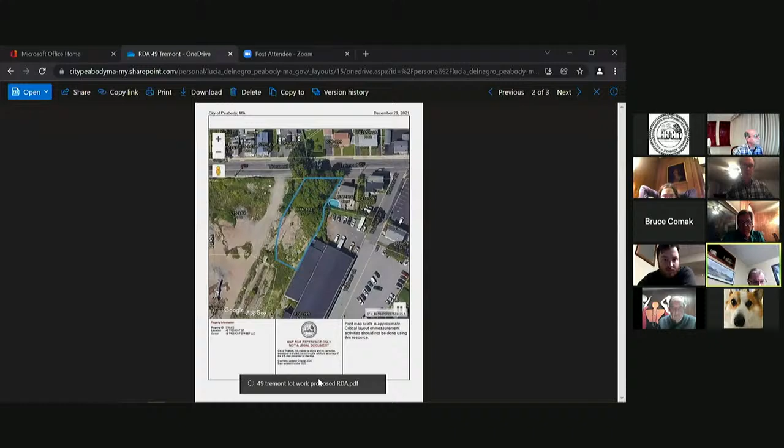I think there were two sheets from the plan that were filed, one that showed quite clearly the lot divisions and landscaping, and the second was grading, utilities, et cetera. And yes, that is the lot that Lucia has provided. That is the lot, and there is no building on it.

Since that aerial photo was taken, the grading to the west has all been completed, and there is a building currently being completed on the rear lot, to the lower right. That third building shown on the plan, so there are 3 buildings.

You want to build the one from lot 2A. You're saying the building on the lower right is under construction now? Well, now I've lost that. The building at the rear,

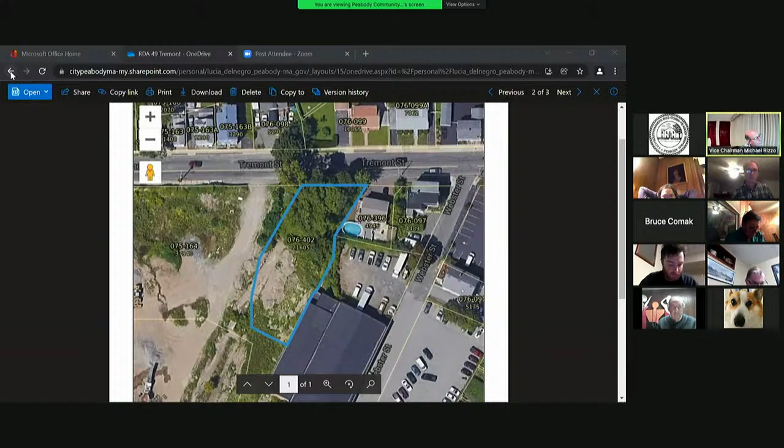14,730 square feet, yes, that's actually up. That building is up and receiving inspections as we speak.

I see, and the other one, the one closest to the street, has never been begun, and I believe that Ahmad, if he follows through with this project, that proposed 2-story building may have to have its own filing. He bought that lot over 2 years ago and has never begun construction.

And the proposed building, 14,730 square feet, which sits on lot 3A, that is built.

Through the chair. Go ahead. What is the scope of work for this RDA?

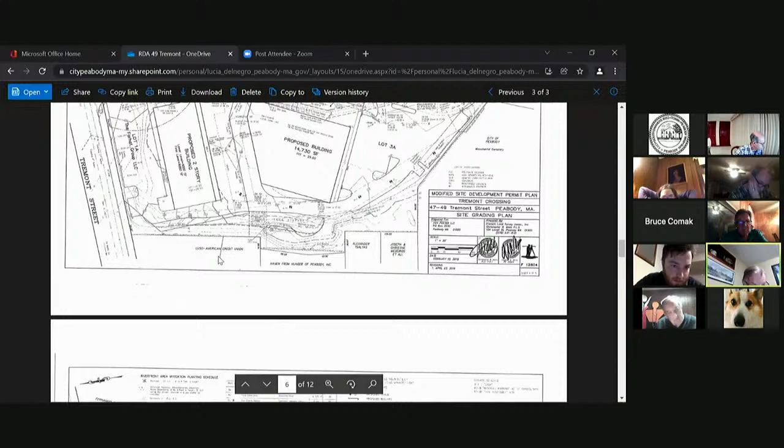The scope of work contemplated for this would be the actual construction of the building and the installation of the plants required. Do you see the area in front of the 2,200 square foot building? There's an area, yes, I think Lucia is pointing to it now, those plantings that are up.

Adjacent to Fernando Cunha and adjacent to the open portion of the stream, those plantings must be completed. There are plantings there today, some of which were never disrupted and never removed, but it requires a planting scheme. There's a site planting schedule that had been previously approved, and that would be the planting configuration that would take place.

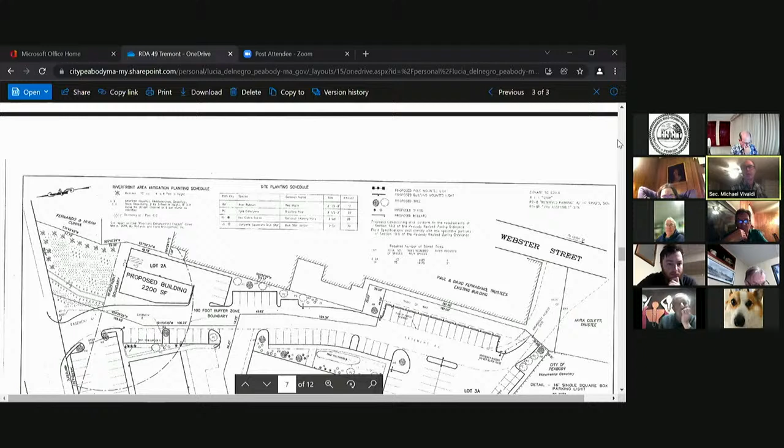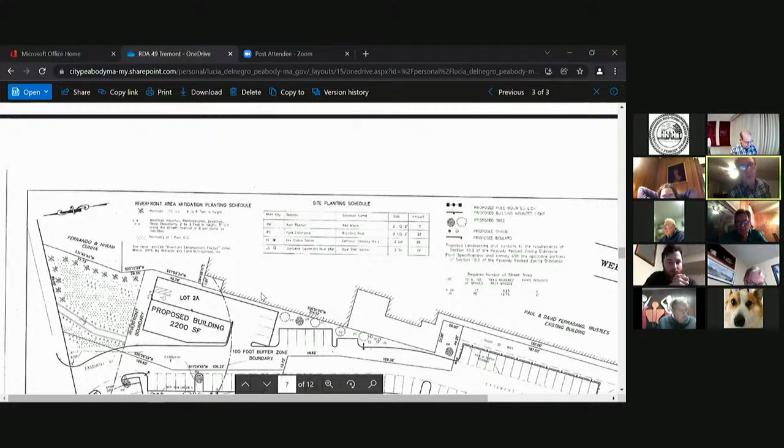If I may, I'd like to ask a question. Go ahead, Mike. If an NOI was originally submitted for this application, the original construction process years ago, and now the applicant would like to submit an RDA, I didn't follow the reasoning for this change of applications, if the work is the same or not. It was kind of confusing, I'm sorry to say.

Oh, it is confusing, and not working with it daily, it was a little bit confusing. So why does the applicant feel that an RDA is sufficient at this time?

My sense was, when we were given notice, we were in the site plan review process. Nothing had changed with respect to the physical aspects of the plan, the grading, utilities, et cetera, were all intended to be the same. When we were provided with notice, very accurately, that our order had expired, I thought it was more expedient and cost effective, since we were building everything just as originally approved without change, including the odd shape of that 2,200 square foot building.

We were still intending to build it in that fashion and are intending to do so today. My feeling was that it would be more direct and faster to ask for an RDA based on building in accordance with the expired order.

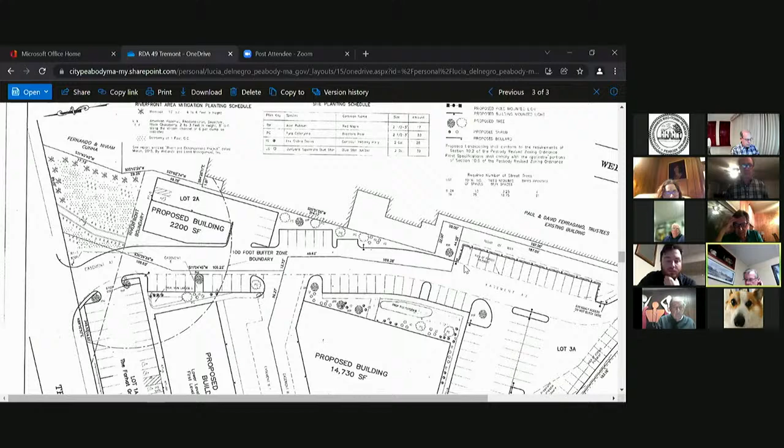Stormwater management had been scrutinized, and we changed, upgraded, and upsized the stormwater management system during the process until we were finally approved by the Public Services Department, and we have installed downspouts at their direction.

We've provided some, there's a small retaining wall, which is really on the property line between ourselves and Paul Ferragamo's building, which has been in existence for 100 years. We've got a retaining wall there that was approved by Public Services, which will prevent overflow to his property.

Is that on this? Is that on these plans, that wall and stuff? Yep, because all the work having been undertaken has all been undertaken with those approved plans. And that's the set of plans that is referenced in the order of conditions. And I provided 2 sheets from that plan.

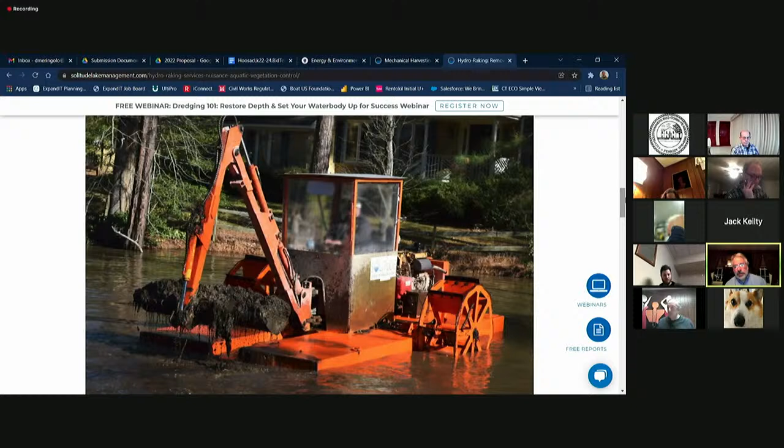This is not considered dredging. It does not remove any material that has been consolidated into a mucky material. The York rake—I'll see if I can find a different picture.

You can see right here, this is a York rake, so it's not a bucket. It will only collect material that has some structure to it—not a fine grain muck material, only something that has root systems or still has some structure to the plant.

Basically the machine goes into the work area, removes the vegetation, brings it over to shore, and drops it off. Either that, or we have a floating pontoon barge or even a mechanical harvester used as a transport barge. The hydro rake will sometimes load that machine or barge and then move it over to shore, so it doesn't have to go back and forth to shore each time.

But it's a very effective way of removing that built up organic material and helping to restore some water depth, removing all of that material that otherwise would be slowly decomposing and creating an oxygen demand.

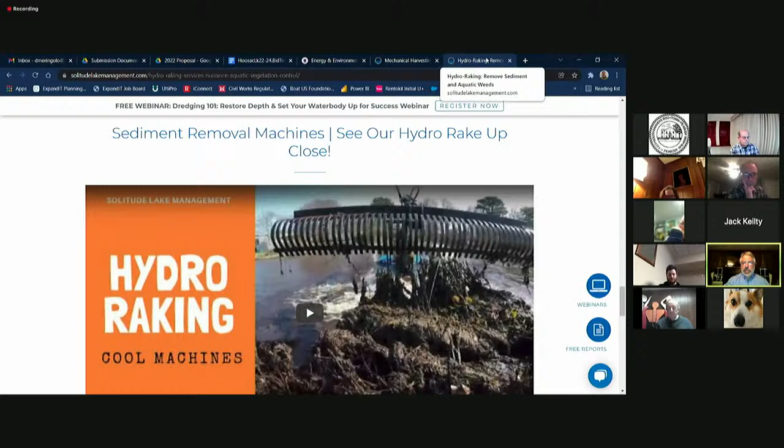For the hydro raking versus the harvesting—hydro raking is more likely to be used on the recreational water bodies. Harvesting could be used to remove plants in the drinking water reservoirs, where herbicides are not allowed, or most herbicides are not allowed.

Harvesting could be used in those water bodies to remove submersed plants that typically aren't the best thing to remove with the hydro rake. They have less biomass, are more dainty I guess is the right word, and don't have a really significant root system. The harvesting can be used to remove those plants.

It's definitely a very good alternative to using herbicides for the drinking water reservoirs. And as I mentioned, the mechanical harvesters are sometimes used as a transport barge, so they're not actually doing the cutting themselves, but they have storage on the back of the machine. As you can see in this picture, the hydro rake can load up the back of that machine like a barge, and that can be used to transport material back and forth to the shoreline.

Right now, there is work being planned for Elginwood and Mill Ponds, but this NOI is very generic in nature for all water bodies. So as stated in the NOI, as work develops and gets planned for any of these individual water bodies, we would prepare and submit a more detailed work plan.

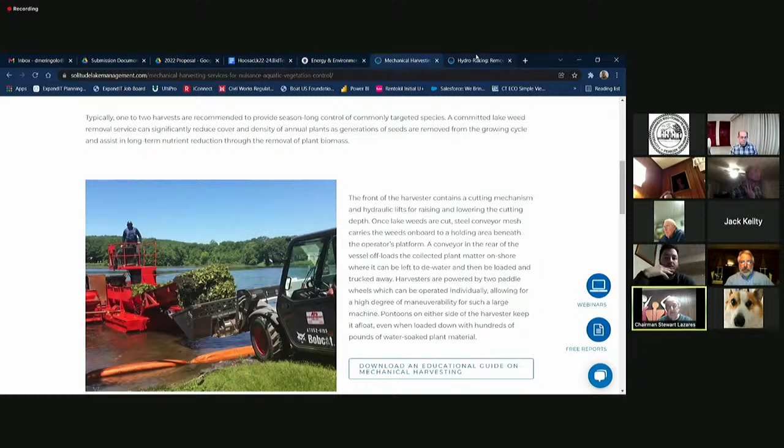Anybody else? No, I'm good. The NOI has already been signed by the mayor, so I believe we do have a file number - I checked earlier. Okay, still sharing my screen I guess - you can see it right here. There's a file number and there didn't appear to be any comments.

I don't recall ever actually getting the file number letter from the DEP, but I did search again right before the meeting, saw the file number, didn't see any technical comments.

So just going on Stewart's statements a few minutes ago, is the goal to achieve and clean all the ponds mentioned in this NOI, or to do half or a quarter for 2022? Well, in 2022 and 2023, we'll be lucky to get one pond a year. However, does it take that long to do one pond? No, it costs that much money.

It's all about the cost, yeah. So the way we're paying for this is we're applying for funds from the Community Preservation Commission to help us defray the cost - it's under restoration of open space. So, again, you'll have an opportunity... it's affordable, but we wouldn't want to do it all at once anyway. That would be an extreme cost.

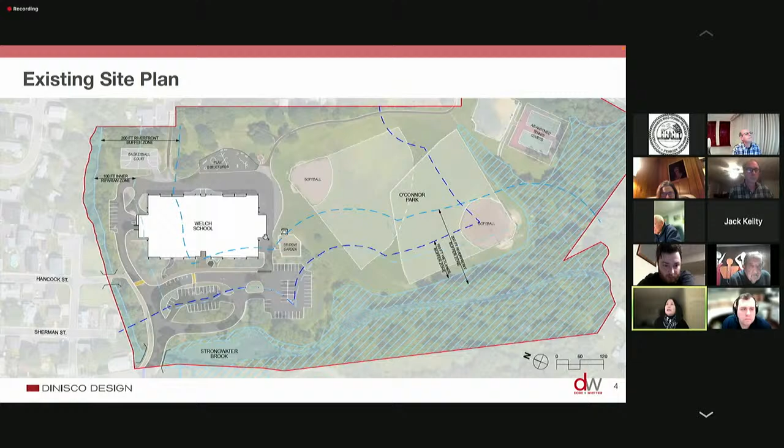The project site, as you may all be familiar, is about a 19.6 acre site. It's bordered on the north and the west by Strongwater Brook and by O'Connor Park to the south, and a residential neighborhood on the east. So while the site is fairly large, our limit of work really is limited to the area around the building. You can see here, the dashed line defines about a 4.27 acre parcel of work.

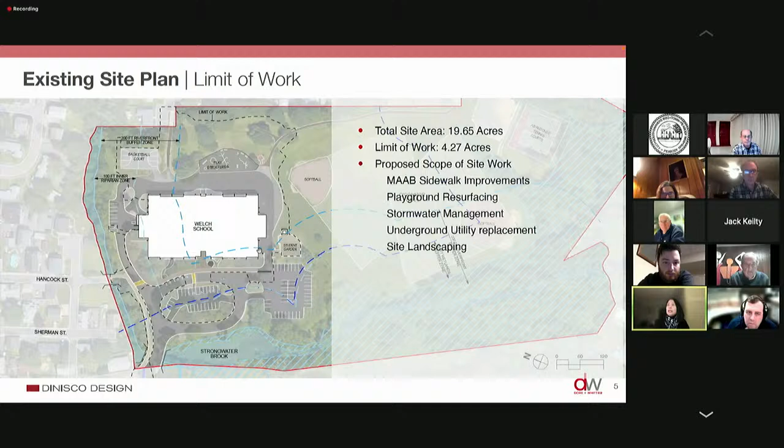So as I mentioned before, these are the proposed site improvements. We will be doing work on sidewalks to provide an accessible path from the surrounding neighborhoods. That will include curb cuts and some curbing work. We will be relocating accessible parking spaces into this existing parking area, creating a table so that there's an accessible path from this parking to the building.

The existing playground will be repaved. The area where the play structures are will also have new finish and a new rubber surface. The basketball court, which is where the CM is planning on staging and locating their trailers, will also be repaved at the end of the project.

So in this little area in orange is a 425 square foot building addition. There will be limited utility work, so some of the site work will involve doing a little bit of trenching and backfill. We are adding a sprinkler system in the building, so we are tagging on to the existing water service and creating a fire service that will go directly into the building. We have a little bit of duct bank work for communications, and that is pretty much it for utilities.

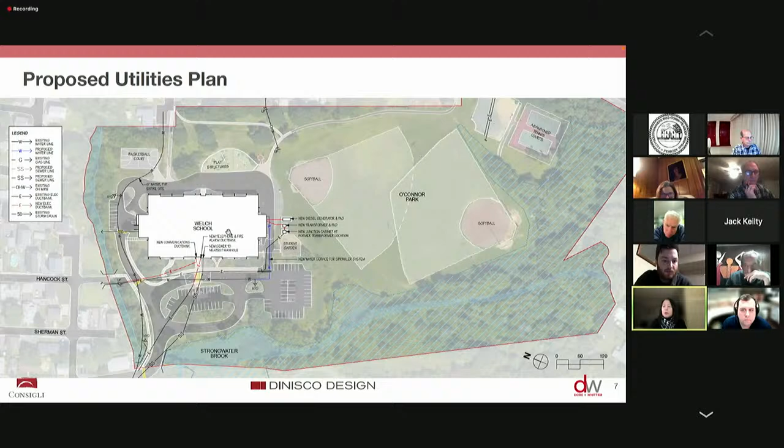There is going to be a fair amount of stormwater work that Kevin will be talking about. So with this work, we will also have a little bit of planting. The site has a good number of mature trees, and those will be protected during construction. You can see that these little dashed lines around these trees are where those existing trees are. We will be planting a couple of red maples on the backside where the improvements are being made to the playground. And then there will be a few shrubby areas here, which will include deciduous, evergreen shrubs, as well as grasses and perennials.

Kevin? Once again, my name is Kevin Riopel. I'm with DGT Associates, the project civil engineer. I'm going to talk briefly about the wetland resource areas, stormwater management, and how we're complying with the DEP regulations and the city's regulations. So just briefly, the existing wetlands on the site were delineated by Fred King in our office back in September and October of 2020.

The resource areas on the site are within the watershed of Strongwater Brook, which is a perennial stream and is classified as a river under the Massachusetts Wetlands Protection Act, as well as the Peabody regulations. The river flows westerly through the site, along the western side of the site in about a northwesterly direction. It flows underneath Swampscott Ave in 3 very large culverts, and then flows northeasterly along the northerly property boundary. Bordering vegetated wetlands were also found to exist along most of the westerly portion of the stream throughout the site. Next slide, please.

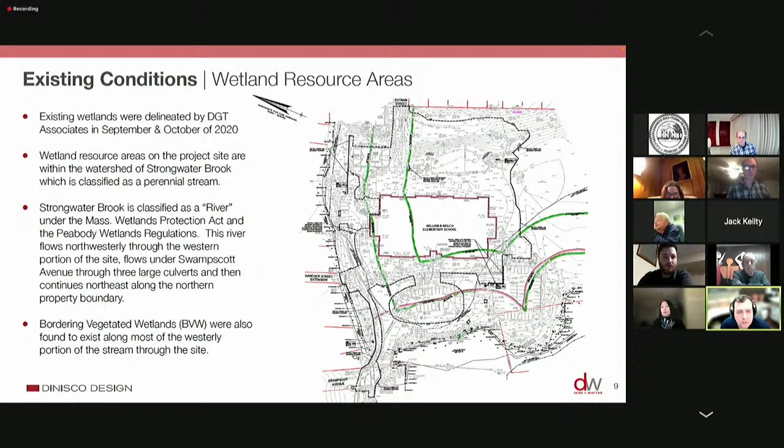So, work within the jurisdictional areas. As Vivian mentioned, we are proposing total alterations for the project of 4.27 acres of the total site acreage of 19.65. So relatively small in comparison to the entire site.

We are proposing about 0.36 acres of work within the buffer zone, and we are proposing 2.18 acres of work within the riverfront area. There is a total of 7.64 acres of riverfront on the site. All of the proposed work is within previously disturbed and altered areas. There are no alterations proposed to any of the existing natural areas on the site.

Prior to the start of any work, we are proposing to install all of our perimeter erosion control barriers, which will be maintained throughout the construction process. I did speak with Lucia earlier today, and we are going to be adding some additional erosion control barriers.

These are going to be installed to protect the westerly wetlands, mainly in the area of that parking lot where we're going to be doing handicap parking improvements. There's a little bit of repaving going on in there, very minor grading work in that area, so we are going to add some additional erosion control barriers on the plans there. Next slide, please.

Without getting too deep into it, I'm not going to bore everybody tonight with my several hundred-page stormwater report, but I'd just like to hit some highlights for everybody.

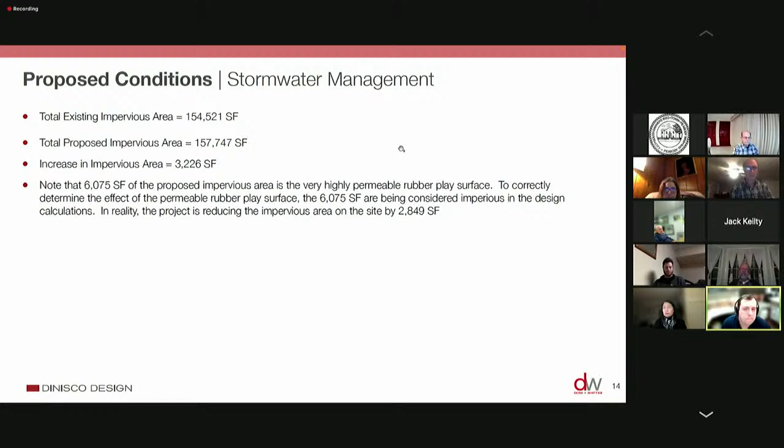So what does it all mean? After our stormwater analysis, we're looking at no increase in the peak rates of runoff for any of the storm events—the 1, 2, 10, 25, and 100-year design storm events—to any of the design points, either areas of the wetlands or other analysis points. The same can be said for the volume of runoff; we're not providing any increase to any of the design or analysis points.

We are providing the recharge to meet the DEP stormwater regulations. Both the Recharger number 1 and the rubber play surface are considered LID stormwater techniques, and we're actually reducing the amount of paved surfaces in the riverfront area by just over 1,100 square feet. I do have complete documentation showing how we maintain compliance with all 10 standards in our stormwater report, including hydrologic analysis and stormwater operation and maintenance plans. If anybody has questions at the end of the presentation, I'd be more than willing to get into as much detail as you'd like.

So with that, I'd like to hand it back to Vivian.

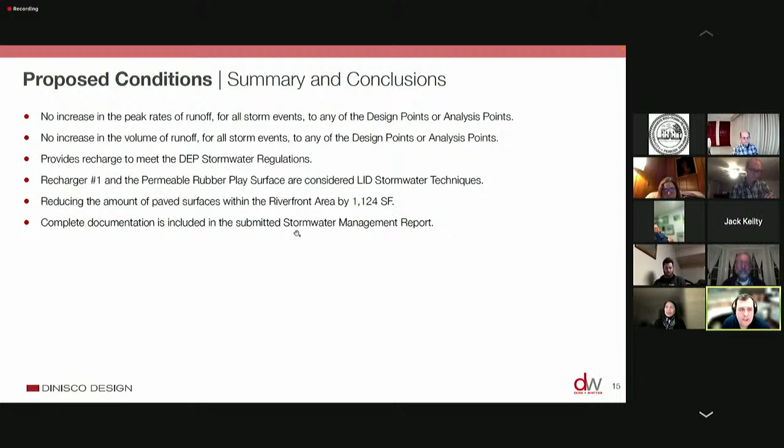Thanks, Kevin. So we just have a few photos to share to give you a little bit of context, and most of you may be familiar with the school. The site, in terms of pavement, is not in great shape, so where we can, we are repaving. However, the budget for this project is fairly limited, so we are trying to get as much bang for the buck as possible.

Here's the front entrance, and this is the existing crosswalk. We are going to be building the addition right in front of this existing entrance to bring the admin area out, so there is more of a presence once you enter and approach the building. That provides a great deal more security than they currently have.

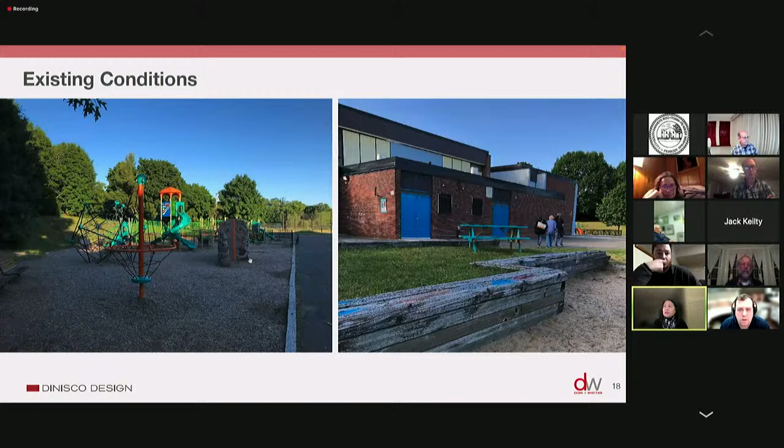As you scoot around the building, this is the loading dock area that Kevin had referred to. Then as you scoot around the back, this is the back of the school, adjacent to the play area—it's a paved playground. This is the existing basketball court that will be used by the CM for staging, and this is the playground area that is going to receive the rubberized play surface. This then is the south end of the school.

So we are currently in the construction documents phase of this project. We are planning on issuing 2 early packages. The site package goes out in April, and we anticipate work to start for site prep as well as building demolition this coming summer. It's phased, and this project will involve children moving from quadrants of the school to other quadrants as they are completed. We anticipate completion of this project in the fall, November of 2023.

And that concludes the presentation. Happy to entertain questions.

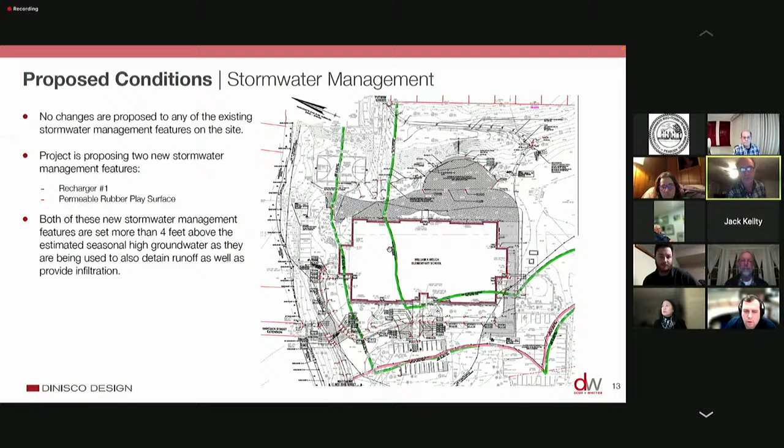Thank you, that's very informative. Is it the wetlands, or is it a buffer area? It's working in the buffer area, correct? As described, that's correct. Not even in the wetlands, not even close to it. It's all work within the buffer zone. Yes, that's correct.

It all sounds very great for the town and the kids. I support it. Good, great presentation, great project. I have a question, actually two questions.

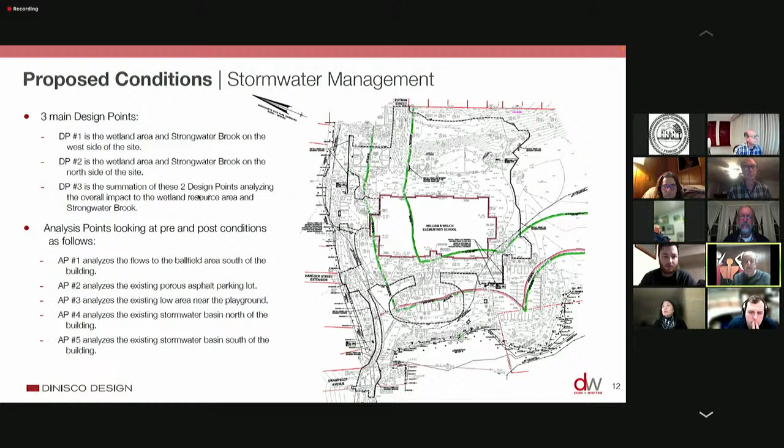Are you doing any work in there to clean it out? Because it's overgrown, it is just what it is. I keep thinking kids will fall in and never come out.

That's not funny, no, it's a sad thing, but you're right. It's a neighborhood school, and I believe the teachers actually do bring the children out to study wildlife. But at this point we do not have any plans on cleaning that area out. Maybe Fred can address that. Well, there's no money in the budget to do anything with the wetlands at all on the site, and we're basically staying away from it, trying not to interfere with what is out there.

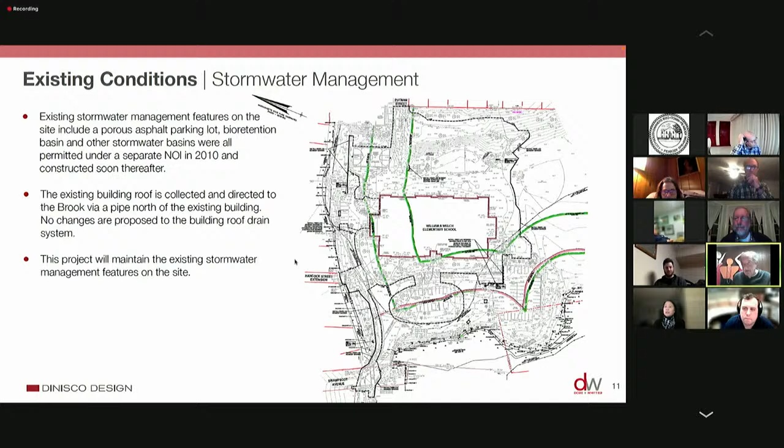One more question. You indicated there is already a pervious parking lot, which I've seen. I poured my bottle of water on it and it goes in, but are you going to change all the parking to pervious? We are not, no. We're actually doing very little repaving as part of this project, and we're not touching the porous parking lot.

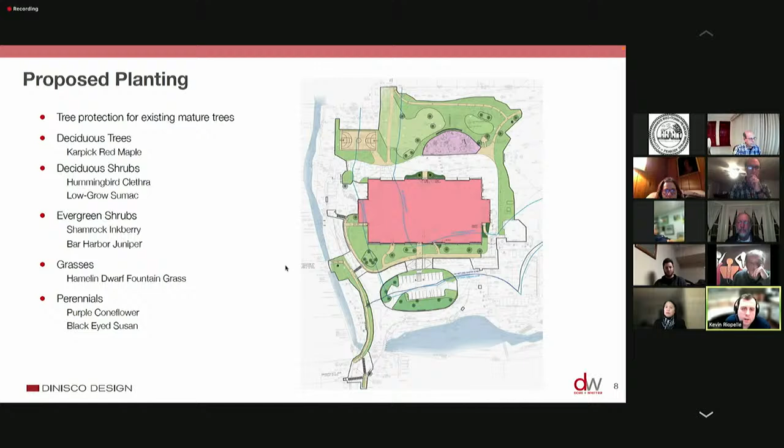The biggest part of the repaving would be the playground area, highlighted right there where Vivian's pointing to. We are making some very minor grading modifications around the handicap parking and at the table to get across the road, but other than that, we're keeping all the new pavement on site as regular asphalt.

Are you addressing the continuous potholes in the front? Directly in front of the building, I know we're doing a little bit of repaving, but we had a meeting with the DPW and I think they're going to try to find some money elsewhere in the budget. Maybe not necessarily here, but the intent is to get all of the pavement resurfaced out there, maybe do a mill and overlay. So we're working with them, understanding the needs for the pavement out there.

Because it's dangerous over there, driving or walking, especially if you have kids. So otherwise, I think it's a great project, and I look forward to seeing it happen.

You're putting in sprinklers in this school, or just plumbing for it? Yes, we are actually adding a fire suppression system, sprinklers. And is the city connecting it to a high power line, or do you have a storage tank for this? No, it's being connected to the existing water service line, but it's going to be separate from the domestic water, so it will have its own line. And we have done a hydrant flow test, so there's adequate pressure.

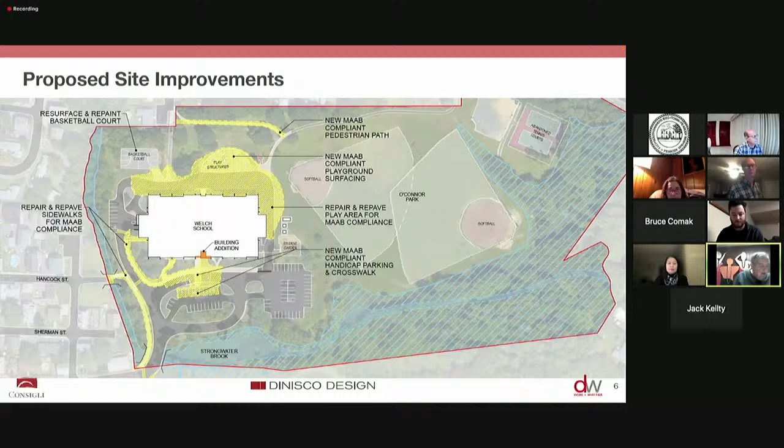Item 6, public hearing on notice of intent submitted by Ann Martin, LEC Environmental Consultants, for RJ Kelly Management LLC. The owner is Analogic Corporation, Andrew Preet. The proposed work is the redevelopment of the property as a storage warehouse facility, including razing and removing all existing buildings and infrastructure and constructing a new state-of-the-art storage warehouse building with internal circulation, parking, loading facility, and supporting infrastructure. The project is known as 8 Centennial Drive.

Did you all hear that finish? Yep, okay. I just promoted Ann Martin with LEC and Scott Cameron, the engineer of record. Is there anyone else, Scott and Ann, who needs to be promoted to a panelist on your team? Yes, can you promote Sean Smith to a panelist? And can I share my screen? I have given you the ability, and I believe that would be yes, correct, Stu? Yes.

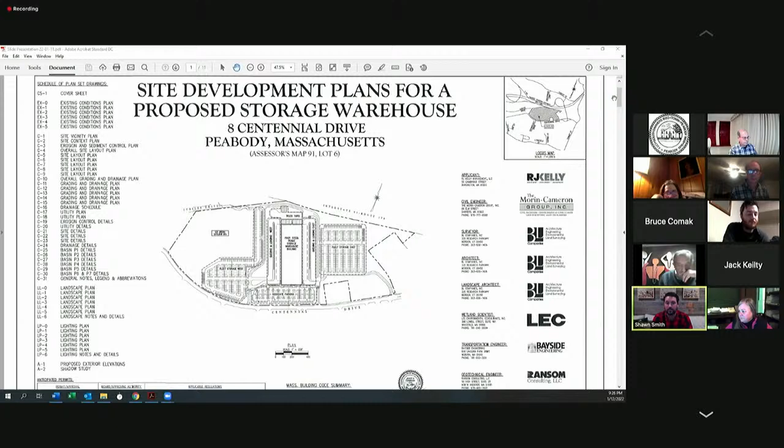The process with peer review is beginning shortly. We also have a MEPA ENF filing in process, as well as a MassDOT indirect access permit for this project. I am very proud of the work that our team has put forward here, and that Scott and Ann will describe to all of you this evening. It is responsible, and I think there are many environmental benefits related to what we're doing here. With that, I'd like to turn it over to Ann to describe our goals and objectives, as well as the current design strategy. Thank you very much.

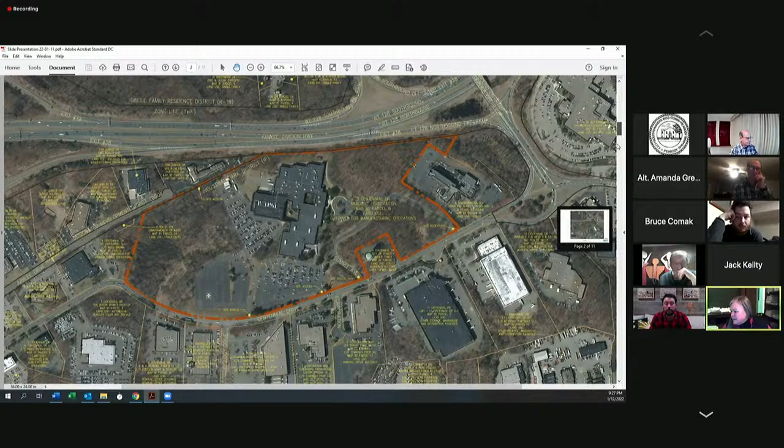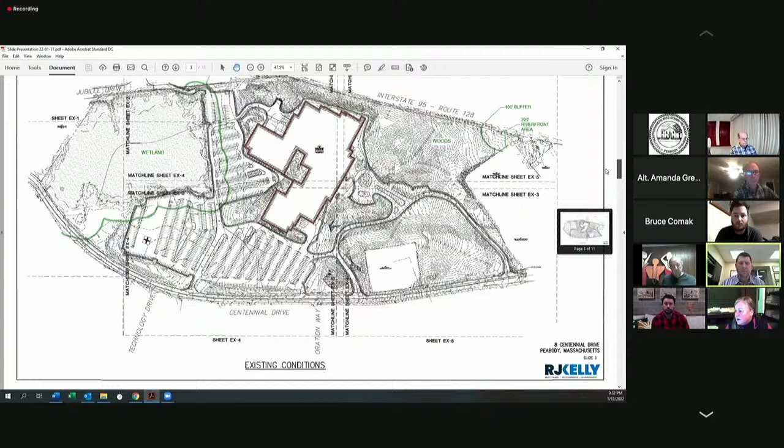Thank you, Ann. Scott - could you go back to the existing conditions plan? And good evening, Mr. Chair, members of the board. Lucia, Happy New Year, thank you for having us tonight. For the record, my name is Scott Cameron. I'm a professional engineer with the Morin-Cameron Group at 66 Elm Street in Danvers, Massachusetts. Very grateful to have the opportunity to be a part of this team and this design and application process with you.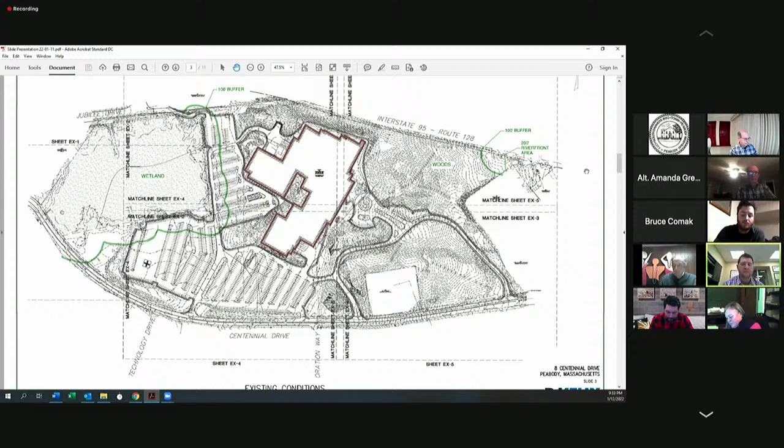We previously presented our introduction to the planning board. As Sean had mentioned initially, through that process the city has engaged, and the applicant has retained various consultants to do a third-party review on this, including the site and stormwater management design, which will be a key part of that review.

The site itself is interesting - watching the history of how this was built out originally in the early 80s. Speaking more specifically to a stormwater management perspective, we can see how the project was built and some additions put on over time, and what they were doing for stormwater management at that point. In the early 80s, we really started to see more closed drainage conveyance systems - catch basins, manholes, and pipes. Not really a lot of treatment, not really any form of mitigation or holding water back on the site. It was more just making sure it drained the parking areas and roof so there wasn't flooding in the usable portions of the property.

Towards the later 80s, there was an addition put on. They added a small infiltration basin to handle the roof runoff. This is kind of the start of some of the more modern stormwater management principles - we start to see those pop up, but in general this site has very little to offer with respect to our current standards for stormwater management design and mitigation measures.

So having an opportunity to take a project of this size and developed condition and have a chance to really redo it - that's the reason we're calling these plans site development plans, because we are developing this site to fully comply with all current practices and exceeding a lot of the standards through the design. I wanted to note that while a big portion of this could have qualified as a redevelopment, there was a lot of effort put towards bringing this up to modern standards. Next slide, please.

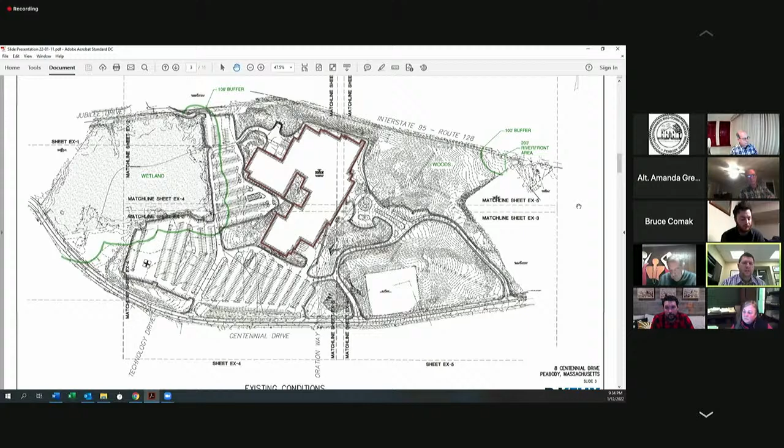So Ann already went through the overall site. I won't rehash that again. If you skip down, going down, next slide.

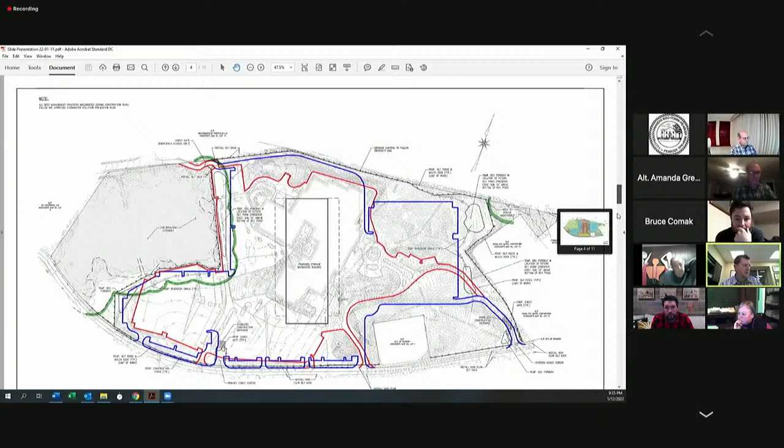If you go down to the first zoomed-in color site plan, we provided some in this presentation. I'm just going to go through a couple of representative illustrations of what's in the site plans. Again, most of the project is outside of the buffer zone, the jurisdictional areas, although all of it does eventually drain to jurisdictional areas. So from a stormwater management perspective, all our discharge points on this side are in the buffer zone.

And what you're going to see, typically this is in the fleet storage. When I say fleet, this is where the vans would be parked overnight. What we see here is we are pulling the edge of pavement further away from the wetlands. The northerly part of this color diagram, you'll see a yellow strip, which is actually a sidewalk.

And then you see a gray strip, which is an electric vehicle charging strip, and then you get to the parking spaces for the vans. So they won't be pushing snow over this area. They can't, because that's where they need to plug in the vans. So this will really prevent and prohibit that occurrence from happening, whereas right now snow is just pushed directly into the wetland and off the edge of the embankment.

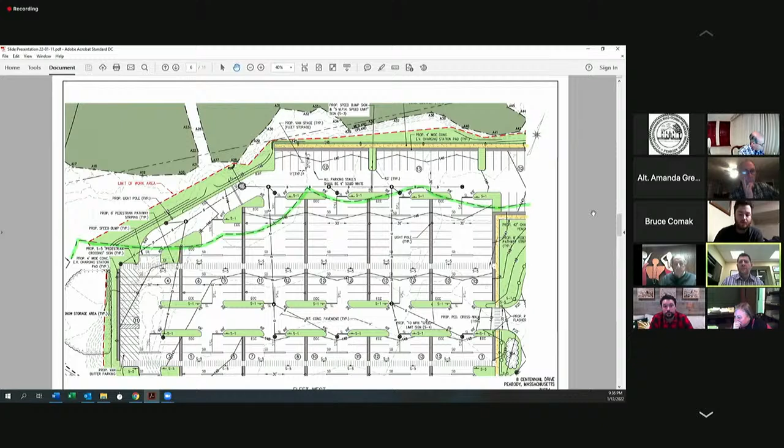You'll see the parking area, we're adding in landscape islands. You will see, in particular, kind of the middle top left, a drain manhole and then a U-shaped symbol closer to the wetland flag A28. That's one of the existing outfalls for the drainage system, which we are utilizing and reconstructing.

So right now that outfall doesn't have really any erosion control measures to it. There's a little bit of stone at the end, but you can see how it's scoured and eroding because that's just what it is. The newer outfalls will all be fully constructed with outlet protection, so we don't have erosion, and of course the water coming out of those is cleaned before it gets there. If you could go to the next slide, please.

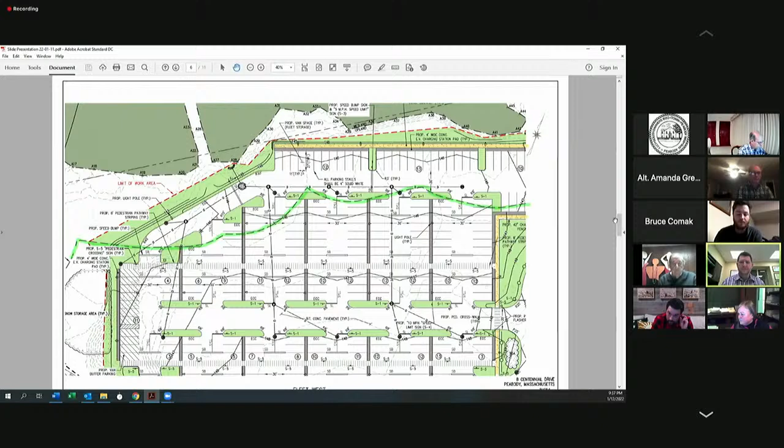This is really the rest of the work that's in the buffer zone. We pulled the pavement well off the wetlands in this area, between 50 and close to 110 feet further away. So the pavement got pulled way back, and in place of that we are designing a stormwater management basin.

This is kind of a combination basin where the lower part of it we will be in a rock or a poorly drained soil, and the upper part will be in a sandier, better drained soil. But at the end, this is going to be doing the bulk of our mitigation, so holding the water on site before slowly releasing it back to the wetland or recharging it back into the ground.

You can kind of see on the very right edge there's an outfall, and then right in the middle of the basin there's another one. Again, fully reconstructed, fully stabilized. Those are the only 3 outfalls that will remain; there are a total of 6 there now. I'll go through that in another slide, but those that remain will be fully stabilized in accordance with current construction practices.

Again, all the stormwater management entering this basin has been fully renovated, going through a treatment train of catch basins with deep sumps and hooded outlets, and hydrodynamic separators, which is an enhanced way of separating out finer particulate, oil, solids, and floatables from the stormwater before it comes into the basin. So you're actually meeting your standard of 80% total suspended solids removal before it even gets into the basin, and the basin does additional treatment, getting another upwards of 60 to 80% treatment just in the basin itself. So we meet and exceed the treatment standards of the Stormwater Management Handbook for all of our design points.

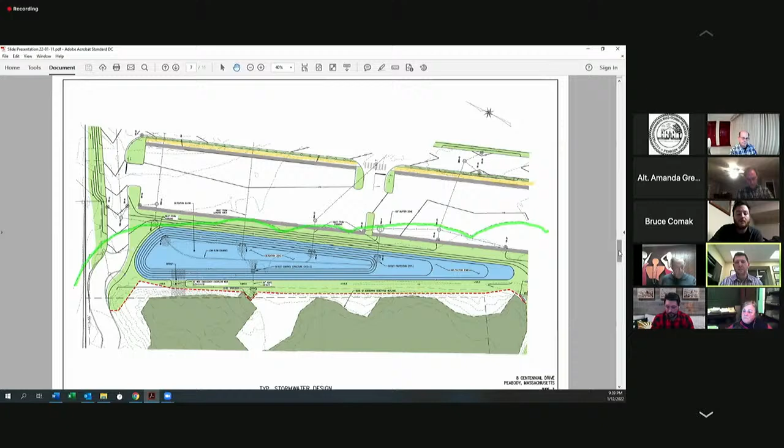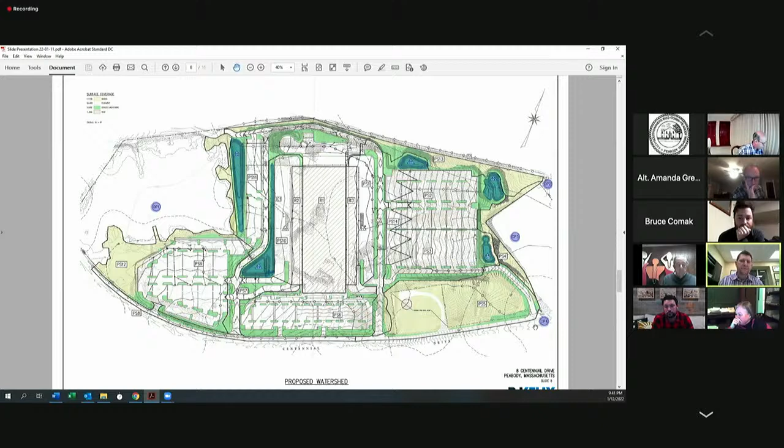Spreading all the stormwater management out allows us to capture and recharge a lot of that volume. The blue circles on this plan are the existing outfalls or discharge points from the site. Over the wetland there are six of them, and on Centennial Drive there are two.

The two on Centennial Drive are closed pipe connections to the municipal drainage system—these are municipal separate storm sewer systems, or MS4s, as the acronym goes.

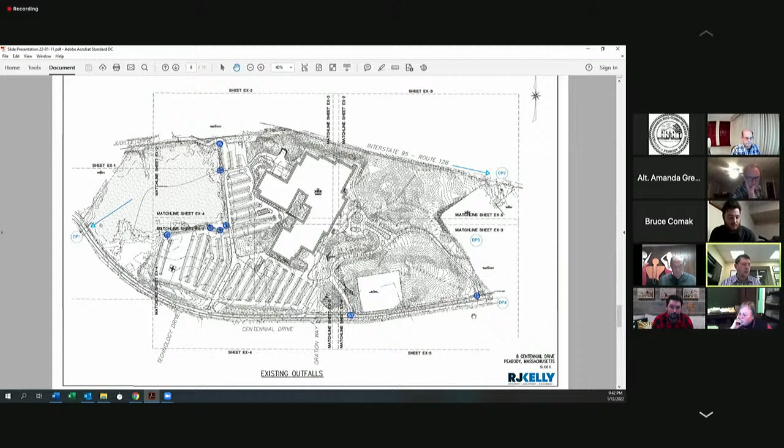On the next slide, we are removing three of the outfalls that currently go to the wetland, so those will be gone. We're retaining three others, but those will be reconstructed. And we're adding two new outfalls to the northerly part of the property, shown in green, which go to the Mass DOT layout.

On Centennial Drive, we're removing one of the connections, so that will be gone. The other connection, on the very right, we're actually going to retrofit with a treatment system, so the discharge there is fully treated, and again we're mitigating the runoff as well. Next slide.

This is just the overall site plan. I want to close with a bit on some of the other measures we've added into the stormwater management, which has been a big focus.

We had a clean slate and worked through all this. Peabody's stormwater ordinance already requires mitigating the volume of stormwater runoff, whereas under state standards we're only required to mitigate flow. Flow is usually what contributes to immediate flooding during a storm event, while volume is more fickle to mitigate because it can cause longer-term downstream flooding impacts as water slowly drains and reaches coastal areas like downtown Peabody, for example—this site eventually makes its way through Goldthwaite Brook.

So as part of the volume mitigation design, the only way to mitigate volume is to retain it on site and put it into the ground, recharging it to groundwater. We were mitigating the volume, meeting the numbers, and we were very close to reaching a design standard we don't see too often.

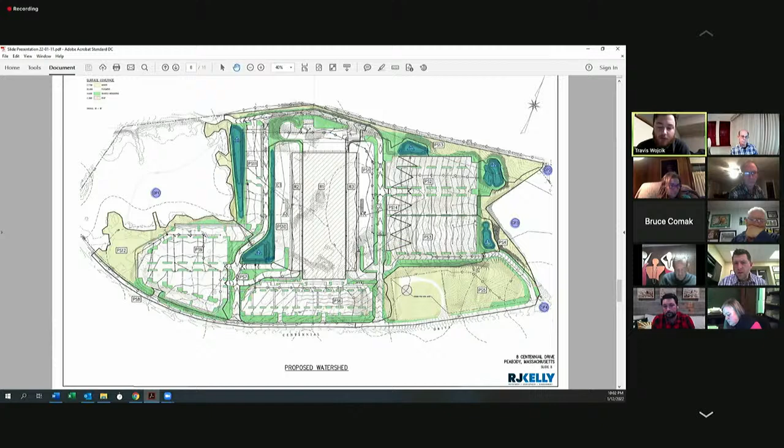Through the chair, I am wondering why there's such a great discrepancy between the associate parking and the fleet storage, as far as how there's that small spot on the southern side, and then massive parking lots on the west and east for fleet storage.

You want that one, Sean? Yeah, I'll take that, Scott. So operationally, the associate parking areas are primarily intended for the warehouse workers inside the building. The way this will work is vehicles will arrive, the vans will remain on site, they'll be garaged, quote unquote, in the city of Peabody. The driver will arrive with his personal vehicle, remove the van from its space, and park his personal vehicle in the space where the van used to be. So you have quite a bit of employment happening here, direct and indirect, third party, direct by Amazon. That's the way they've been able to manage this and reduce their parking demand by sharing the space rather than providing another dedicated space.

So in short, every single one of these parking spots is going to be an employee. Employees probably, they tend to employ third-party van drivers, so they're not direct employees. The fleet size you see here is certainly not the initial total van count, but over time, and certainly during peak seasons, they do plan to utilize this full amount. So on a standard basis, most of these spaces will not be used, but they are certainly used throughout the year.

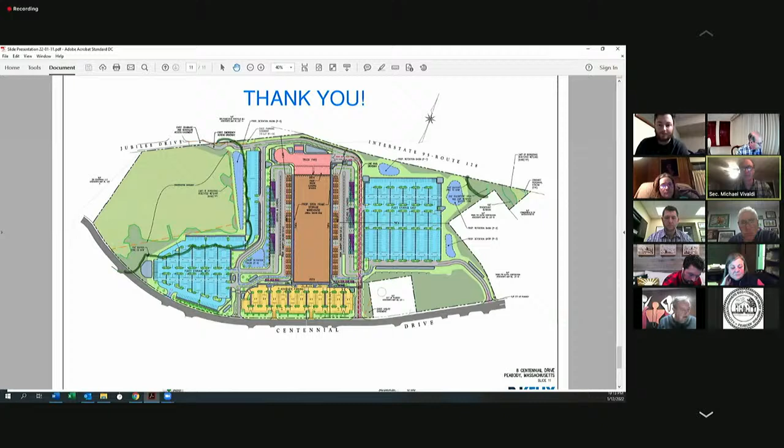May I ask, you mentioned it might be peer reviewed, am I correct? It will be peer reviewed. We actually have the applications in front of us now that we'll be paying for. But as applicant, what I would request is that we continue to the next hearing, and if it's not complete, we'll just continue again. Okay, good.

So we're continuing. There was a motion made by Rizzo and it hasn't been seconded yet. Second.

Okay, so Bruce, were you here for this entire discussion? Because we had to take you off for the last discussion. Yeah, I was here for the whole discussion and for the last discussion, but whatever. Well, you definitely weren't, I know, whatever, for the last discussion. All right, whatever, I was there for every second of this, as you could see.